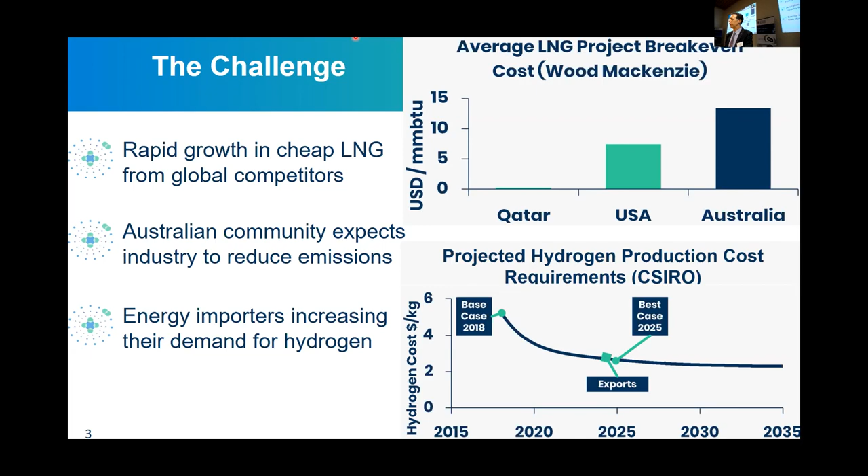It can be done, but it's not a simple matter, and you shouldn't buy into the hype that it can just be done tomorrow. Now, people often say to me, why would you, particularly if they're not chemical engineers, combine LNG and hydrogen? What have they got to do with one another? Probably the audience here understands that a little better, but it's not actually about the technical similarities between these energy vectors.

It's the workforce and the skills. There's no way a hydrogen export industry from Australia is not going to take advantage of the people who've driven the LNG industry here. So transitioning that workforce is particularly important, similar engineering and practice, and also the business relationships. The shipping routes are important, the jetties, those sorts of things. So in fact, my argument is that the fact that we have an existing world-leading LNG industry gives us a natural advantage in the race to become a global hydrogen exporter.

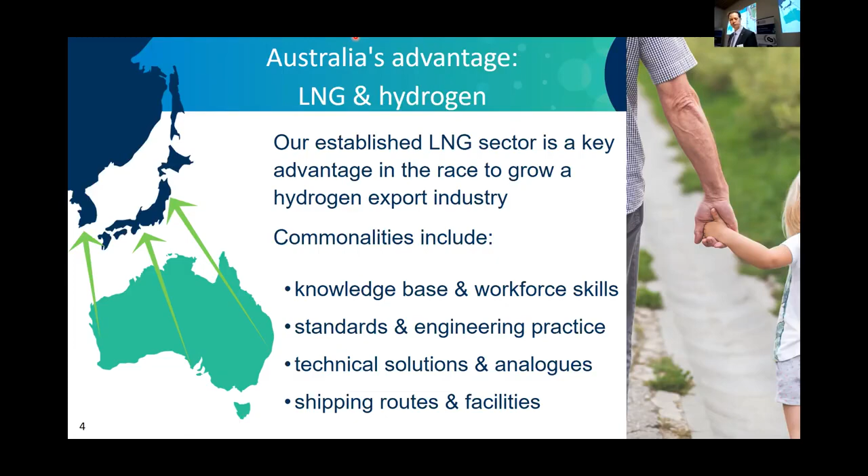So this diagram looks at what the CRC, what's in the frame or in the scope of the CRC. We're not looking per se at the production of the various types of energy, but how they are used to sell and export that energy.

So there are two major columns, LNG and blue hydrogen on the left here, green hydrogen on the right. Starting on the left, we're looking at ways to increase the efficiency, the throughput of LNG exports while also offsetting their emissions. So figuring out ways to do carbon capture more efficiently and sequestration more efficiently from LNG production, reducing fugitive emissions and the like. Really lowering the footprint is a key activity for the centre.

But similarly, we want to look at the cheapest way of making hydrogen today, which is steam methane reforming, coupling that with CCS. None of these technologies is particularly innovative, and they've been demonstrated by themselves, but it's when you integrate them and figure out how you really drive the cost down so that integrated technology becomes competitive, that is a key challenge for us.

Once you've got the hydrogen, you've got to figure out how to get it to your customers overseas. There are multiple options, and we are agnostic about the vector, the energy vector, whether it's ammonia, liquid hydrogen, or a liquid organic hydrogen carrier. We think that will very much depend on the market, who's buying it.

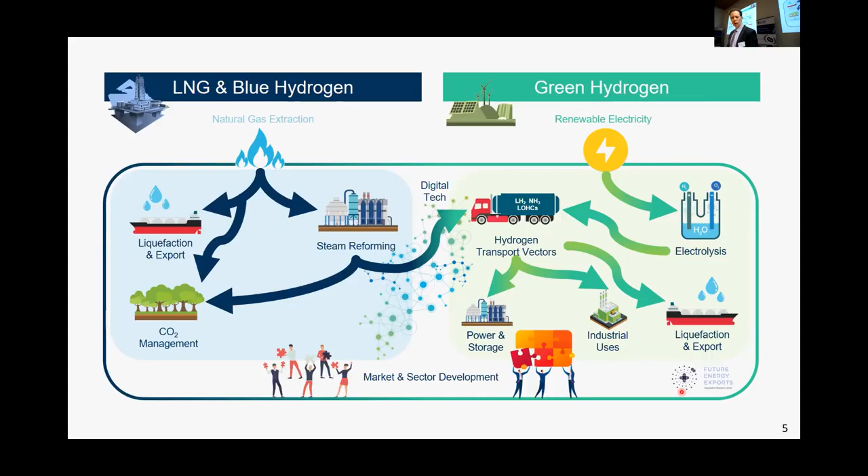One of the things that's different about cooperative research centres is that they're actually independent from the university, a bit different to the ARC centres and chairs that have been run out of UWA before. The Future Energy Exports CRC is actually a not-for-profit company that is independent of the university, although UWA and others, as well as industry partners, can be members of this not-for-profit.

So we have a board of experienced industry professionals, and we will be filling that out over the next few months to probably five. An executive team, myself as CEO, Mike Johns is the research director, and most of you know Jill Stajduhar, she's the Chief Operating Officer.

The research directors are led by senior academics at the university. At Curtin, we have Professor Vishnu Pareek and Professor Craig Buckley leading the hydrogen program. Program 1 is the LNG stream. Program 3 is the digital technology stream, led by Professor Stumptner at University of South Australia. Program 4, the market and sector development program, is co-led by academics at QUT, and we're fortunate to have Professor Ian MacKinnon also at QUT, who is the strategic advisor on hydrogen to the Queensland government.

So we've set up this company, and essentially the way it works is that this set of collaborators will be investing over 10 years, $38 million, matched by a Commonwealth grant of $40 million. We got the first payment of that last Thursday, so one payment down, 39 to go. Obviously the Commonwealth reviews progress and makes sure we're delivering on the R&D we've committed to, so that's our challenge as a management unit.

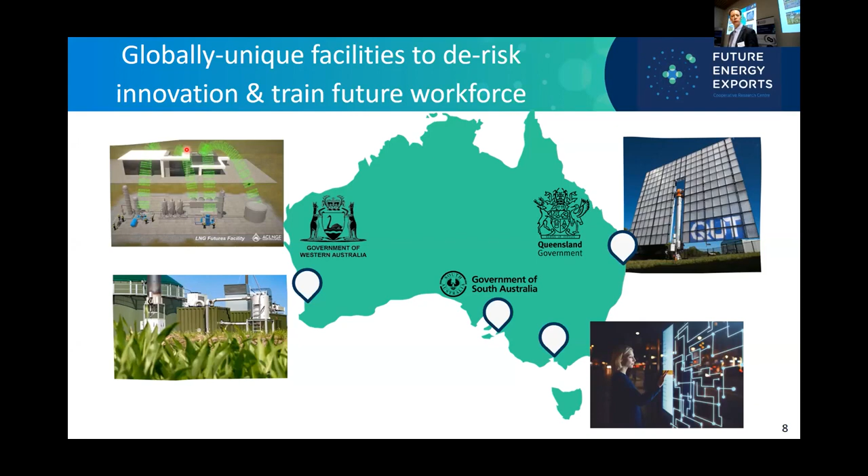So I think of this as a foundation project for the CRC, the LNG Futures Facility. For those of you who haven't seen the video, I think it's worth a look - it's the Premier and Chevron CEO Mike Wirth at Shanghai last year at LNG 19, explaining why it's important. The cartoon video is shown here.

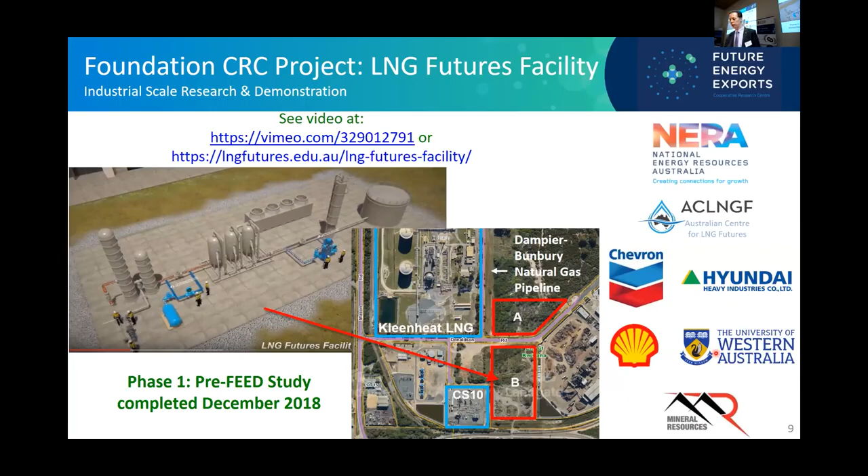The idea is that you have a small scale LNG plant which is not there to make money or to make LNG, but rather to provide common user infrastructure to test out and demonstrate new technologies, whether sensors, mixed refrigerant compositions, or new ways of recovering valuable compounds from the gas. We did a pre-feed study in 2018 and identified this location, which the state government has leased to us for the next 10 years, right next to Compressor Station 10 on the Dampier to Bunbury pipeline. This study, as well as the feed we've done, has been funded by NERA, Chevron, Hyundai, Shell, and UWA, and Mineral Resources Energy has put in a lot of in-kind work and continues to do so.

So last year, and at the moment, we've been doing the feed, working with Clough to generate something like 197 documents, which, although it's a small project by the scale of many in this state, has been quite an interesting and excellent learning experience for myself. We've figured out exactly how the process units will be aligned, what they are, who is the vendor, how we're going to tie into them, and what instrumentation will allow us to get better data quality than can currently be obtained from existing plants.

The key concept is, you might ask, well, we've got all these plants, what do we need this one for? Those plants have a task and they're not to be mucked around with - you can't take and demonstrate a technology on them. This one will be turned on and off all the time, deliberately disrupted and operated in modes you shouldn't operate it in from a strictly operational perspective, because you're trying to see if things work better in the way we think they might.

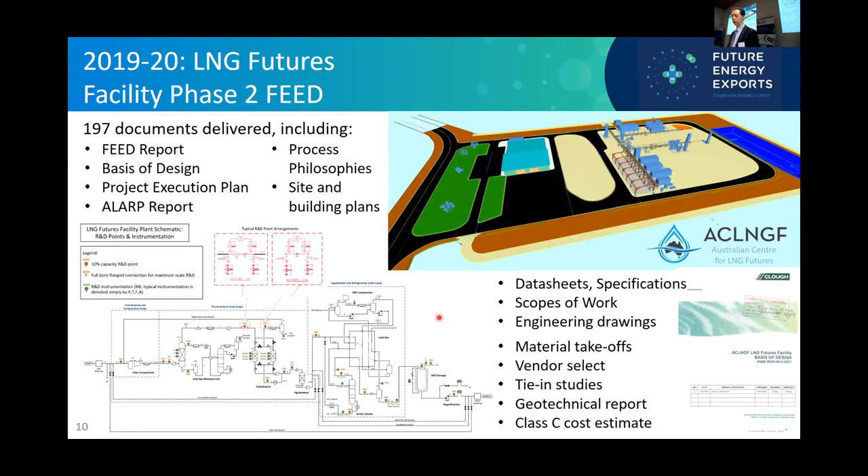This is more on the way it's laid out. The LNG train will sit here. This covered area would be for where you would do much of the R&D, plugging into that train at various stages. I'll talk about that more.

The key other feature that the state government is interested in is its unique training capability. Currently the best facility is ACEPT, which is air and water still, at up to 8 bar, nothing with live hydrocarbons or high pressures. The instrumentation here means we can do a much better job of rigorously confirming whether our models are right or wrong.

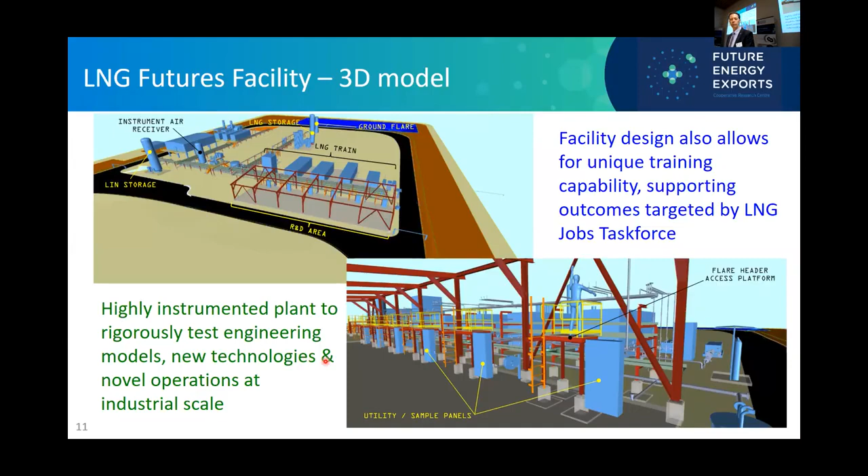But we need to go beyond LNG, as part of the Future Energy Exports CRC, and integrate hydrogen. So I'm going to finish off with a discussion of what we want to do there.

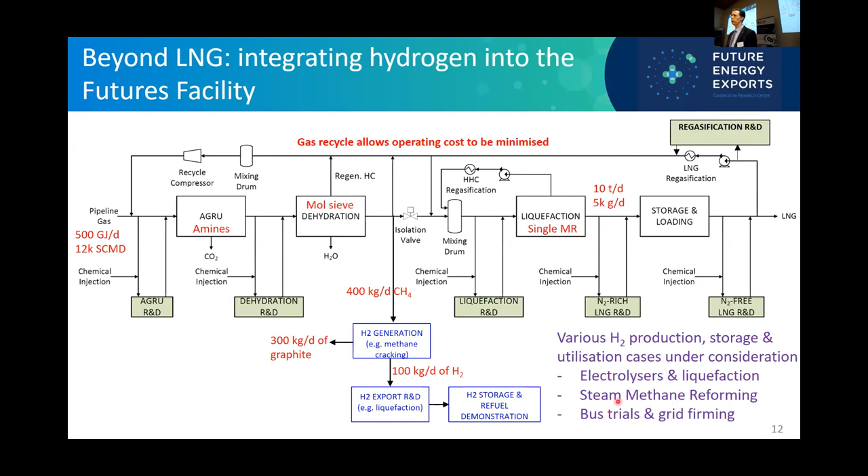Well, you could look at all these technologies in terms of making the various transport vectors, as well as perhaps providing fueling station demonstrations, certification for handling. The whole workforce needs to be trained in how to work with hydrogen. So we're looking at several different options here, including electrolyzers and liquefaction, steam methane reforming, as well as bus trials and grid firming services. Let me talk about them a little further.

One of the options we're looking at is the integrated modular steam methane reforming system with CCS from Wood. It produces about 5 tons per day. The main challenge with this system is that it will take all of the gas that's currently designed for and turn it into hydrogen. There's nothing really smaller.

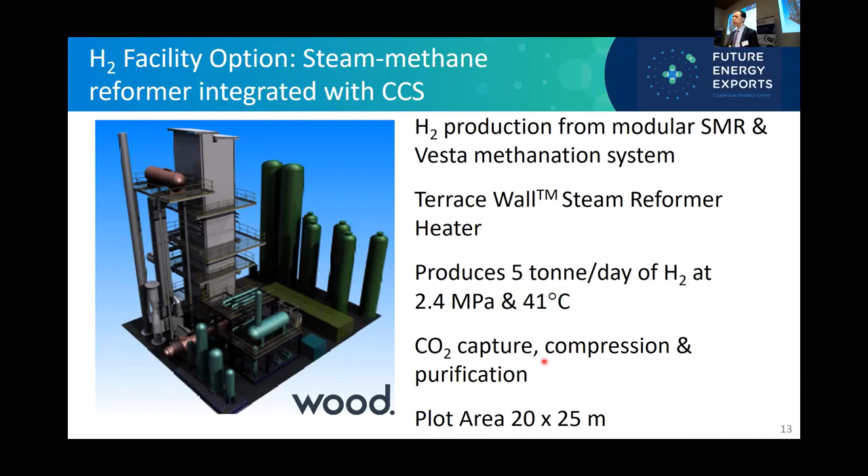That's one issue. But it operates at about 25 bar and 41 degrees C with the CCS. About $20 million for that unit is the indicative cost, ex works, and again it would easily fit into that space we have for tie-ins.

Another one we're looking at with our colleagues at ITM is electrolyzers, in particular this 2 megawatt unit, which would represent one of the bigger hydrogen electrolyzers that's actually been installed. We'd buy the electricity from Western Power, possibly

ideally from renewable generation in Perth, and possibly at a cheap price, and then be able to sell the electricity back when the renewables aren't online - so not only grid firming services, but that sort of arbitrage, if you like. This would generate something like 0.8 tons per day of hydrogen.

So it's certainly easily handled and very pure, high purity - good for fuel cell studies, bus trials. We'd look to sell the hydrogen, perhaps to support a hydrogen bus trial in Western Australia. Again, these are very compact units and would fit easily on our site.

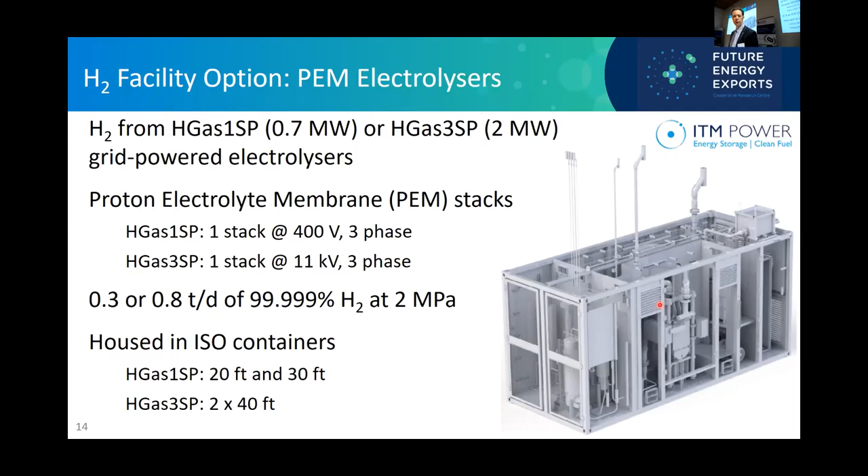What we'd like to do then is take that hydrogen and liquefy it, cost dependent. What I'm showing you here is state-of-the-art liquefiers from Linde. These make about 5 tonnes per day, these particular ones. So these are big, but they have systems that would match the 2 megawatt electrolyzer I mentioned, and that costs about $13 million.

That certainly would allow us to then do a lot of research into hydrogen liquefaction, and particularly improve refrigeration cycles - how do we drive down the energy cost, in the way that's been done over many years in the LNG area, with mixed refrigerants and other opportunities.

Of course, one of the scientific challenges is this ortho-hydrogen to para-hydrogen conversion. For those who don't know, hydrogen is actually a mixture of two compounds that are quantum mechanically different. It's pretty cool that at room temperature and above, it's 75% what we call ortho, but at low temperatures where you make liquid hydrogen, it's almost entirely pure para-hydrogen.

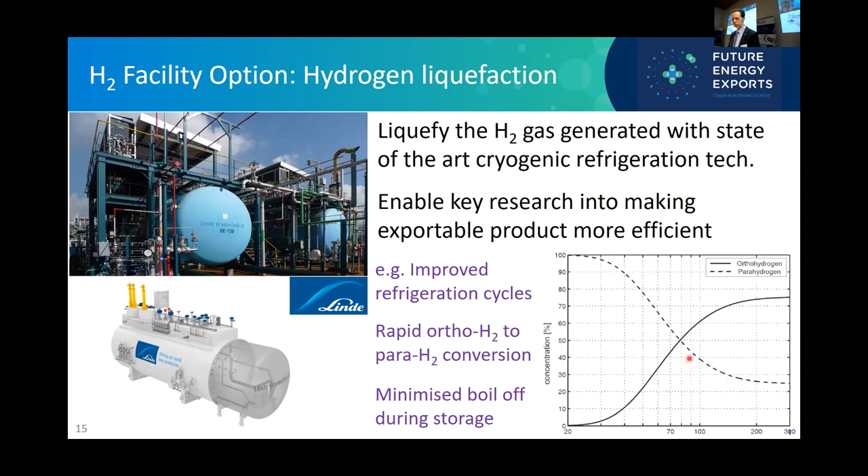What's a problem is it's actually quite difficult to get the molecules to flip from one state to the other. The energy associated with that is like 7 times the energy to boil off liquid hydrogen. So if you don't do it, or if you do it too quickly and they don't properly convert, then all your liquid hydrogen boils off. It turns out in these liquefiers, they have catalysts embedded throughout the system to do that flipping, and that energy conversion challenge is certainly one where we're looking to minimize boil off during storage.

Speaking of boil off, just to show you some of the overlap between LNG and liquid hydrogen, we've been working at the ARC Centre for LNG Futures with Samsung Heavy Industries, who make the LNG carriers, on better ways to model LNG boil off in storage tanks. You might think that sounds relatively simple, but what we understand from our colleagues at Samsung is that the vendors of the tanks provide charts which say, for this particular tank, here's a straight line correlation as a function of pressure, that's the boil off rate you're going to get. If they change the pressure, they have to go to a completely new chart. It's certainly not coded in.

Why does this matter? Well, they have to design these ships with boil off gas compressors on them. If those compressors are too small, you've got a problem. If they're too big, then you're wasting capital, not to mention the weight on the deck of the ship. So that's been their motivation.

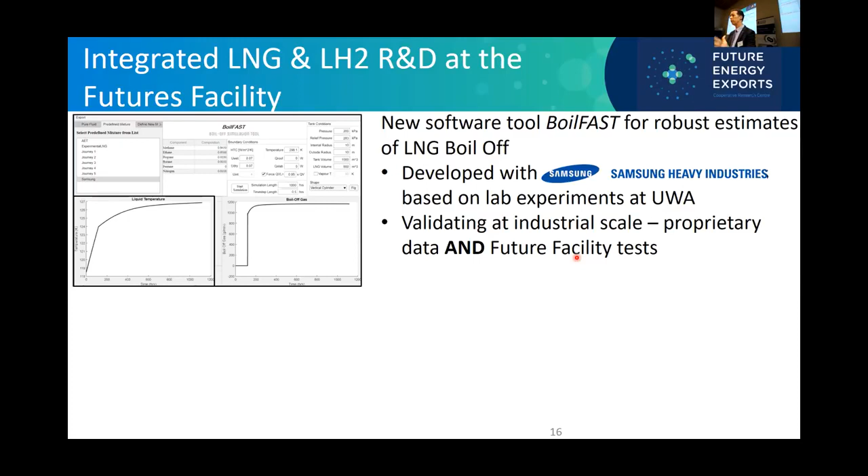We've developed, with a test facility here at UWA plus some modeling, and then validated this model, a software package called BoilFAST, which allows LNG boil-off rates to be described much more accurately, and we're working towards describing stratification. Once the Futures facility is up and running, we'll be able to really optimize that model at a larger scale. But the basic equations are pretty similar for liquid hydrogen.

You've got to change the thermodynamic model and the like, but there is some data out there from NASA, for example, and if you just fit - no fitting, not allowed to adjust parameters, that's rule 1 - you take our model and swap the equations of state, and you actually do a pretty good job of matching that boil-off data available in the literature. But obviously we need to go beyond this, and ultimately there are smart things you can do in hydrogen storage to even further minimize this hydrogen boil off.

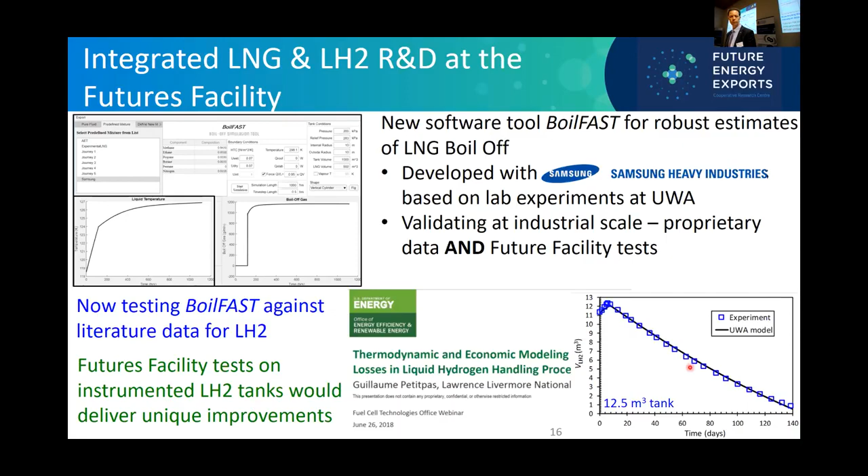So just to wrap up, what's the business model? I'm talking about something that's those unit operations. What we basically need to do is get $80 million to spend over the next 10 years or so.

Grid firming services mean we should be able to get the power essentially net free, because what we pay for power we can sell back in grid firming. And then we've got this $80 million of revenue from R&D and training.

You might think that's a bit optimistic, but point one is the CRC would be a foundation customer. The CRC has $30 million - it's just that I can't spend it all in 1 year, I have to spend it over 10 years - but we'll be a foundation customer. A bit like the agreements that LNG providers make over many years to do at least $30 million of R&D. If you look at the R&D spend that just our group at UWA has done over the last 3 years, it tends to be about $3 million a year servicing the industry. So those two factors alone get you pretty close, and that's without any training and other activities.

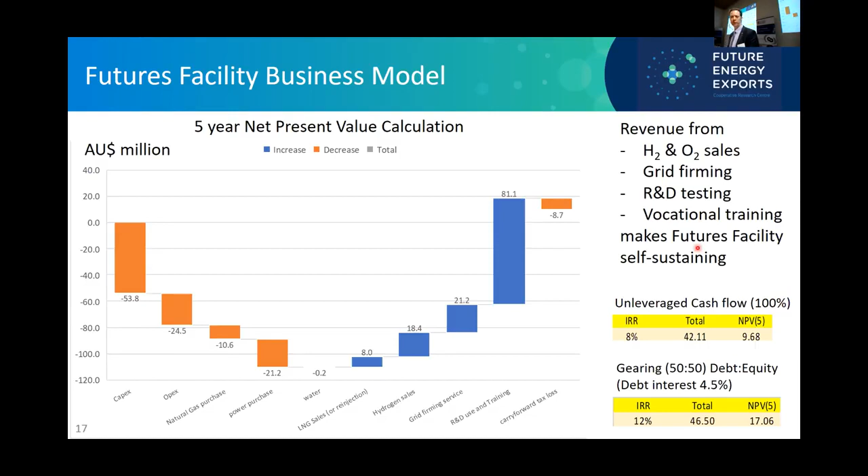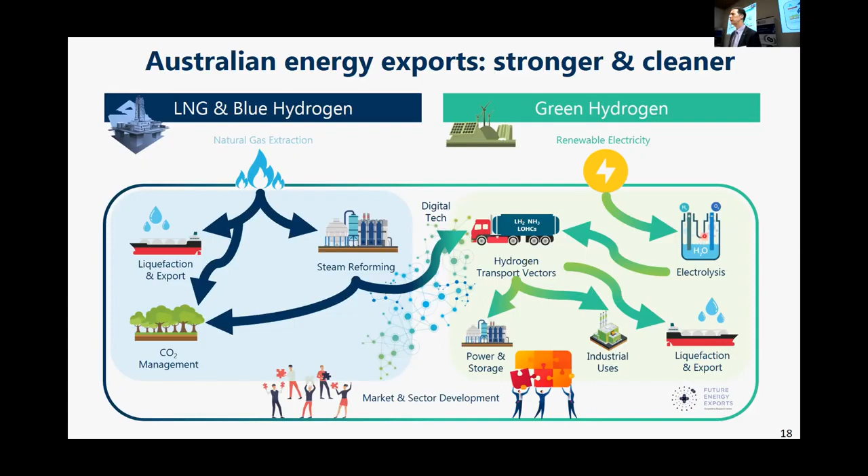So with that, hopefully I've explained to you what we're about and what we're trying to do, and that is to make Australian energy exports stronger and cleaner over the next decade.